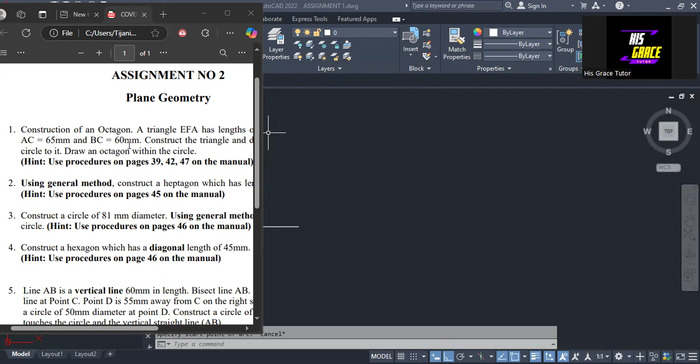And the question one that we have here says construction of an octagon. And the question says that a triangle ABC has a length on sides AB 70 millimeters, AC 65 millimeters, and BC 60 millimeters. Construct the triangle and draw a circumscribed circle to it. Draw an octagon within the circle. So that is the question I should have it there.

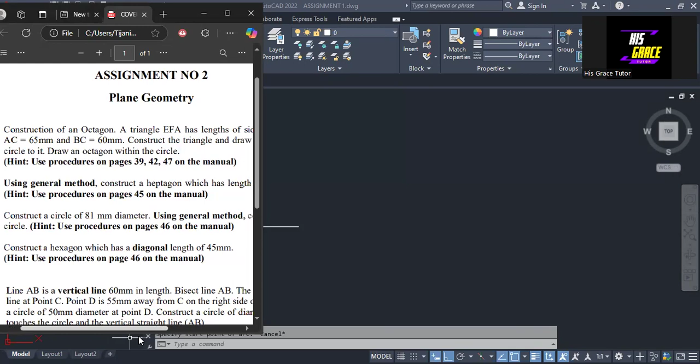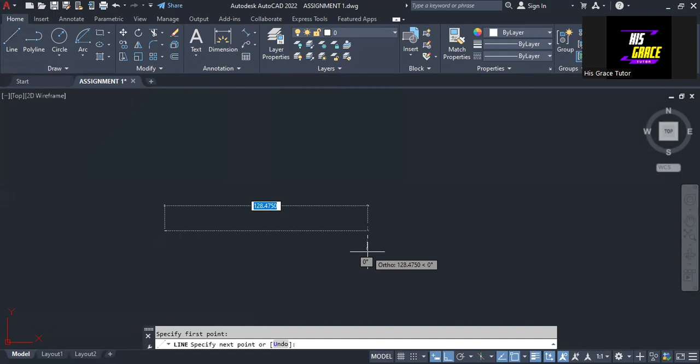So now, let's see how this construction can be done. So the first thing that we have to do here is to draw a horizontal line. So I'm going to draw a horizontal line of length 70 millimeters, which is for AB. So we have 70 millimeters, enter. So then the next thing that I'm going to do is to draw length AC and length BC of the triangle. So I'm going to come here to arc and pick this particular type of arc.

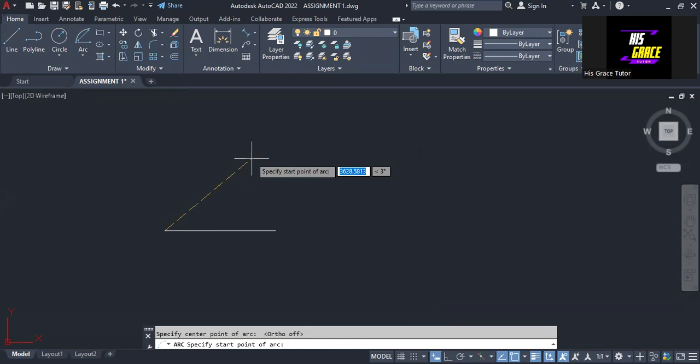Then I need to put off the ortho mode. Then I will click on this point. Then I'm going to give it a radius of 65 millimeters. This is 65. So enter. Then we go in this direction. Okay, so then we take the arc again. So we want to draw that of BC.

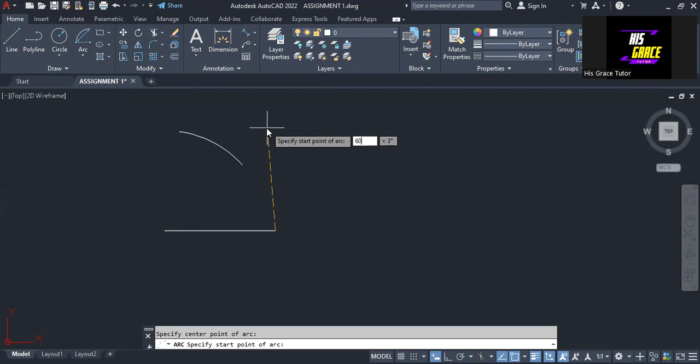As we are told that the length of BC in the question is 60 millimeters, we give it a length of 60 millimeters. So we press enter key on the keyboard. So here we have this, okay? So now the next thing I'm going to do is take a line and join this point and the point of intersection of the arcs together.

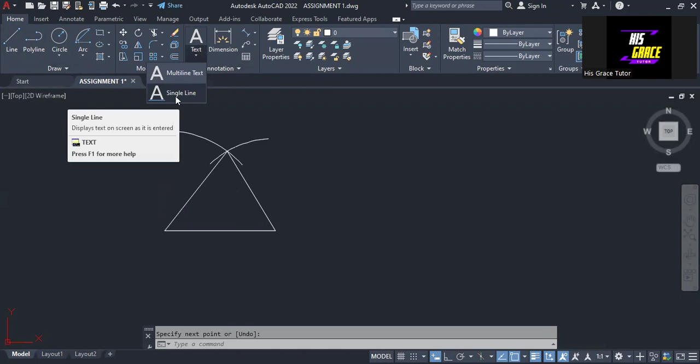And again, I will also repeat the line. So take it from here to the point of intersection of the arc. So we have drawn the triangle ABC. So I'm going to label this point, okay? So click on text and select single line text. So we give it a height of 2 and the rotation angle is 0.

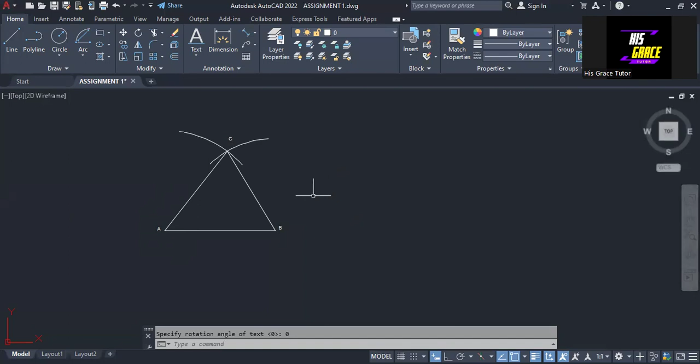So here we have this point. So this point here is point A. This point is point B, while this point here is point C. All right, so we are drawing the triangle as we are instructed. So let's make sure we can see this triangle. So we select the lines and then I'm going to choose a particular line width. All right, so this is the triangle that we have to construct.

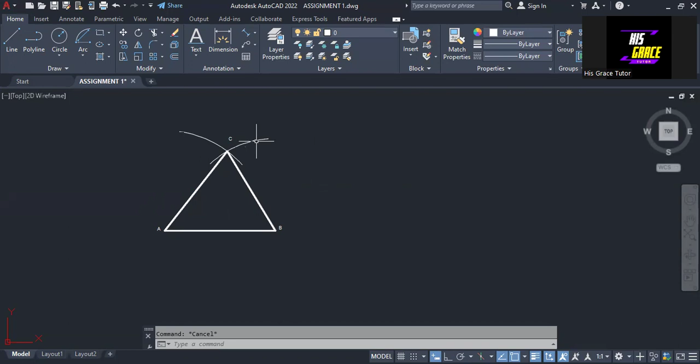And then we are asked to draw a circumscribed circle to this triangle. So I'm going to remove these arcs. I don't want the number of arcs that we have to be too many. So I just remove the arcs. Okay. So to draw a circumscribed circle to this triangle, we have to bisect any two sides. So I'm going to bisect side AC and side BC.

So let's do that. So I will come to arc here and select this type of arc. Then this is the center. Then I'm going to draw an arc. So I will give it a length of 50, and it goes in this direction. Okay, so then I will repeat the arc again. So still on center A, I'm going to draw an arc of length 50. So it goes in this direction.

So then I will make use of center C with the same type of arc and the same length of 50. All right, so I need to do it properly. Okay, so give it 50. Then it goes in this direction. So I will also repeat it again. So with center C, give it a length of 50 and it goes like this. So we have this.

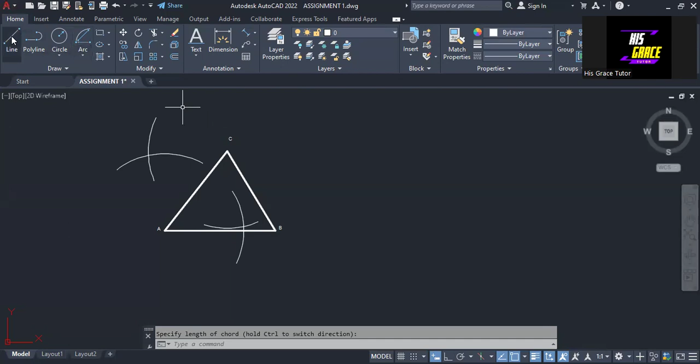Okay, so we can draw a line now to connect this point and this point together. That is the bisector of AC. Now, we have to bisect BC, and to do that, we are still making use of the same type of arc. So with point C here, I'm going to draw an arc of the same length 50, okay? Then I will repeat it to the same length 50.

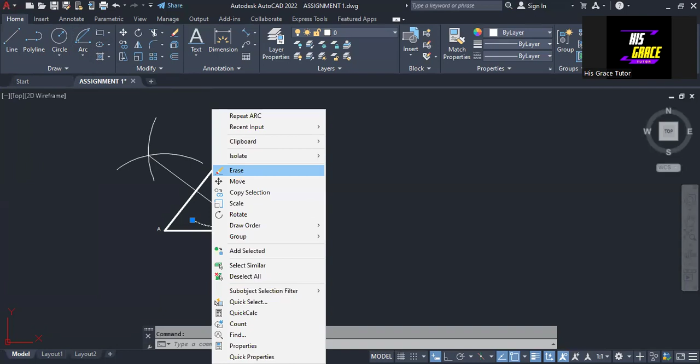All right, so it intersects the previous one. So there's nothing bad with that. We can still leave it and just extend because we use the same length. I can just extend this. So it's okay. Then I'm going to draw again using center B. So this is center B and the same length, 50. So draw like this. And then I will repeat it with the same center B.

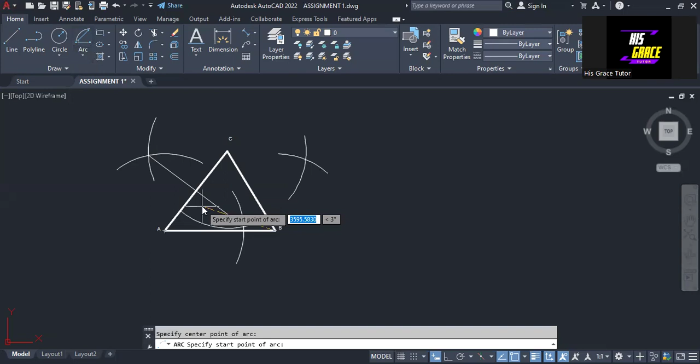And it goes in this direction. So we are taking it down like this. Give it a distance of 50. All right, so it goes like this. So that's it. So I can now draw a line from this point to this point here. So that's it. Okay, so this is the center of the circle, or circumscribed circle.

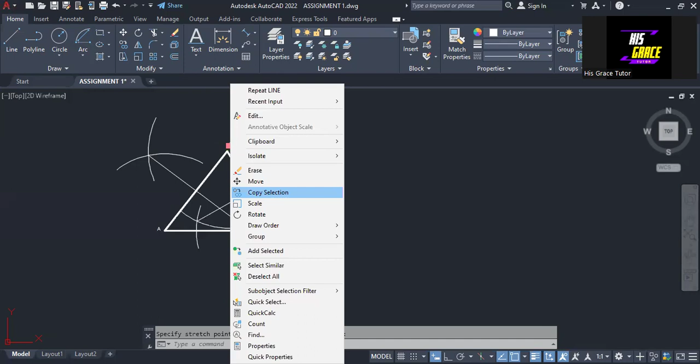So I'm going to be copying this. I want us to have a center for the circle. So I'm going to copy this and bring it to this point. Then I'm going to edit it and call it center O of the circle. All right. So we can now take a circle. Coming to this point, and then the radius is

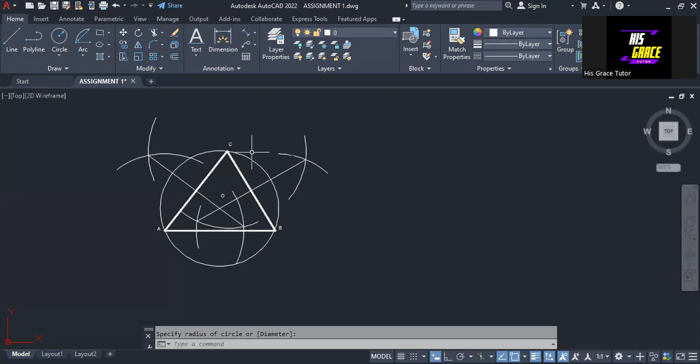going to repeat this. I don't have it where I want to have it, so it doesn't touch the vertex very well. So I'm going to repeat it, using this particular one. All right, so that's it. So we are going to make this circle. So we have drawn the circumscribed circle to the triangle as you can see here on the screen.

So the next thing that I'm going to do is draw an octagon inside this circle as we are instructed in the question. To do that, I'm going to draw the diameter of this circle, but I'm going to divide the diameter into 8 equal parts.

Okay, so to do that, we're going to draw a line at an angle to the diameter of the circle, and I'm going to make 8 equal divisions on this line. I will make use of arcs to do that. So this is the center. I'll give it a radius of 10. Here we have the arc.

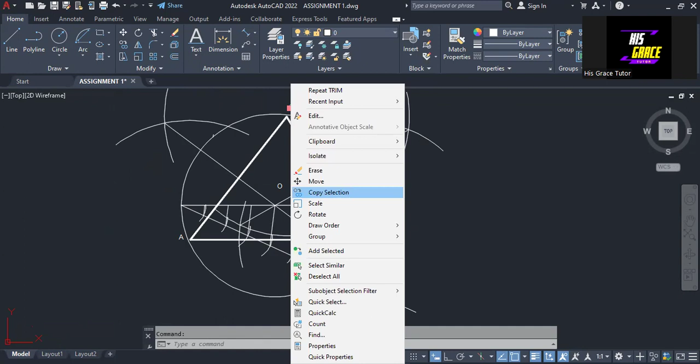So I'm going to trim these lines. So we trim this. All right, so that's what we have there. We have 8 equal points on this line. So I'm going to number them. I'm going to copy this. I want to number each of the points.

All right, so we have this. I'm going to change this. I will edit it. So this is 1. This point here is 2. This is 3. Here is 4. This point here is 5. This is 6. This is 7. And this is 8. So we have all this. The next thing that we are going to do is take the arc from here.

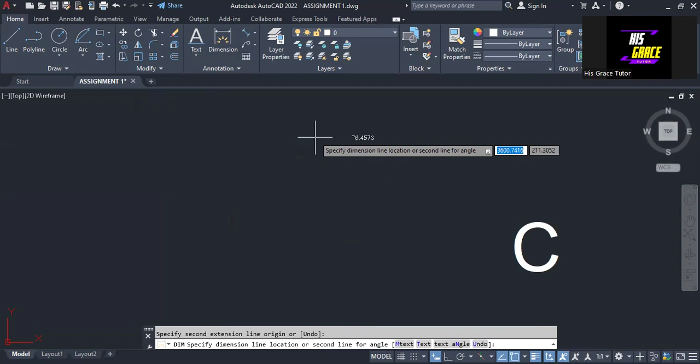So take this point as center. And then, what is the length of the line? We need to determine that before we draw. So I will click on dimension and take the distance from here to here. So what's the distance from here to here? Let's scroll and see. This is 76.4575. So that's what we have here. 76.4575. So we take the arc.

So we come to this point and we are going to give it, okay, so even if I do not measure, I can still make it something like this. So without taking the measurement, I just need to draw this arc. Okay, so I can drop it like this. And also I will repeat the same thing. So coming to this point, and from here, I will stretch it to this point. Then I will draw an arc.

Okay, sorry. So I have to make use of distance in that case because of where I'm going to move the arc. So the distance is 76.4575. Okay, so it will come like this and also rest at this point. That's it. Okay, so we have this done. All right, so don't forget that we want to draw an octagon. That is what we were asked to do.

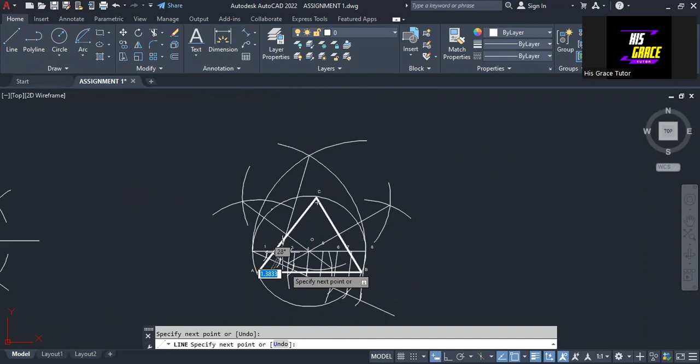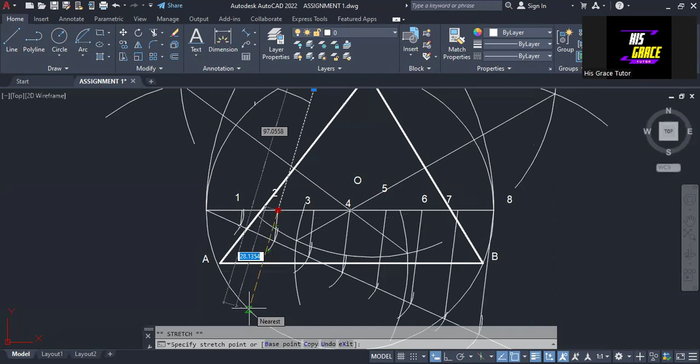So what we are going to do now is draw a line right from this point of intersection of the arcs to pass through point 2. To pass through this point 2, and then we take it down here. Okay, so I'll just come and extend it through that point. I'll just take it like this and extend. Wherever it touches here on the circle, we drop it there. So that's it. Let me check that point very well. So we need to check.

All right, okay, so we have it now. So what we are going to do now is join this point and this point together. So I'm going to take a line and join this point together like this. All right, so this is the first length of the octagon that we are asked to draw.

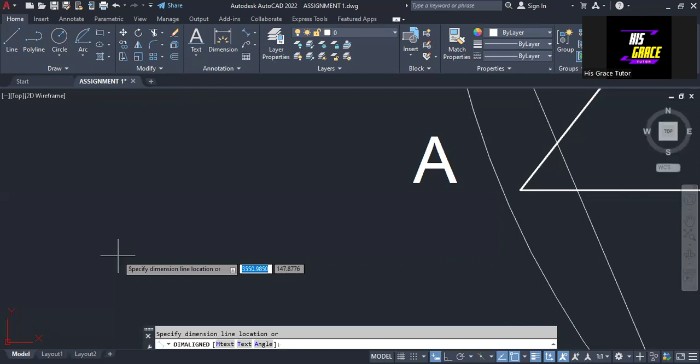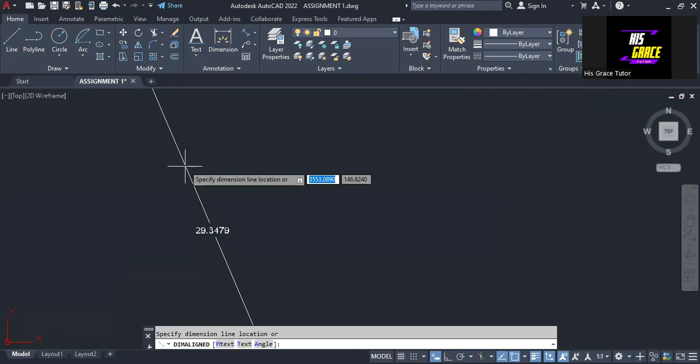So the next thing I'm going to do is that I need to know the length. So I will click on dimension here and pick this type of dimension that is aligned. So I need to measure it, distance from here to here. So what is the distance? That's 29.3479. 29.3479 is that distance. I want to make sure I have it typed on my phone. 29.3479. All right, so the next thing I'm going to do now is to get the arcs drawn on the circle.

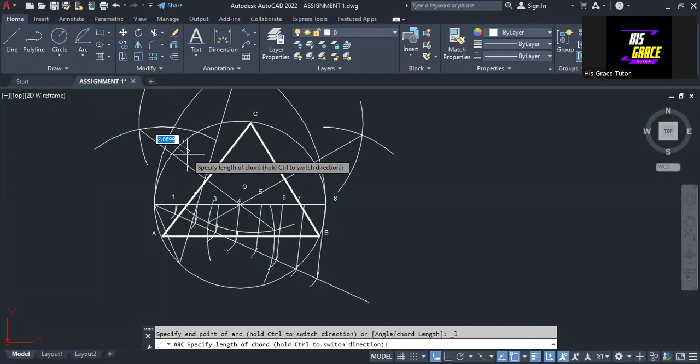So I'll be taking this arc again. Taking this point as center, I'm going to draw from here, giving it a distance of 29.3479. So we draw like this. That does not work. Sorry, I'm supposed to go anti-clockwise. So from this point, we give it a distance of 29.3479. All right, so it goes like this. That's it. So that's another point.

So then I will repeat the arc. Make use of this point as center and then give it a distance of 29.3479. It goes like this. So that was another point. And then we repeat it. Okay, so this is center now. We give it a distance of 29.3479. All right, so we take it again. Now we give it a distance of 29.3479.

All right, so then we take it again. So this is center. So we give it a distance of 29.3479. All right, so then I think we're having the last one now. So this is center, giving it a distance of 29.3479. All right, so there it is. We have located each point. So what we need to do now is to join them together with a straight line.

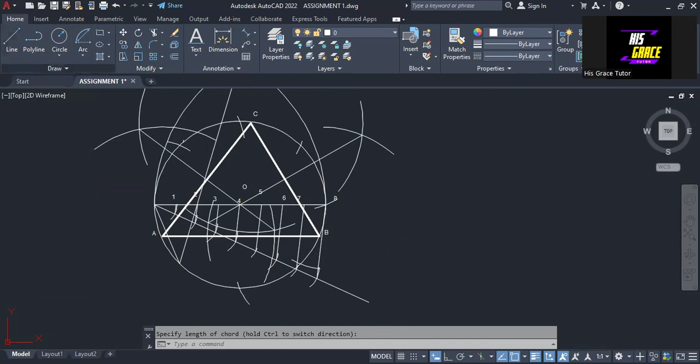So we join this together, and then we join this together. So we join this together. Then we join this together. So we join this together. Then we join this together. And then lastly, we join this together. All right, so we have it. So we are going to thicken the length or side of the polygon.

All right, so I'm going to select this. Okay, so we have the polygon in place as we were instructed. So it's as simple as I've done it here. All you have to do is to practice. And when you practice, you become a master at it.